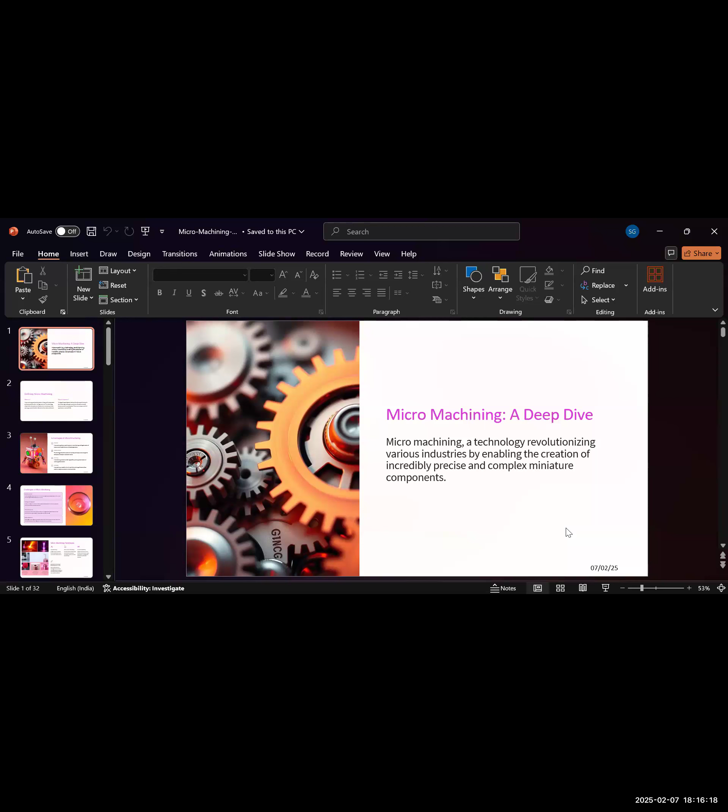Micro machining is a technology that revolutionized various industries by enabling the creation of incredibly precise and complex miniature components that are used in various industries like medical, defense, space, and other areas.

How do we define micro machining? What is it and why is it important? Micro machining involves the creation of very small components with extremely fine details and high precision. This technology allows for the manipulation of materials at a microscopic level, opening up possibilities for advanced and miniaturized devices that would otherwise be bulky and large in size.

We can compress it into a miniature form. Why is it important? Because there's a gap in traditional machining - we are not able to manufacture very small and complex parts using traditional machining methods. So micro machining gives very important solutions that enable nano-scale manufacturing and the production of components with features at the micrometer and micro levels. These micro components find applications in various fields.

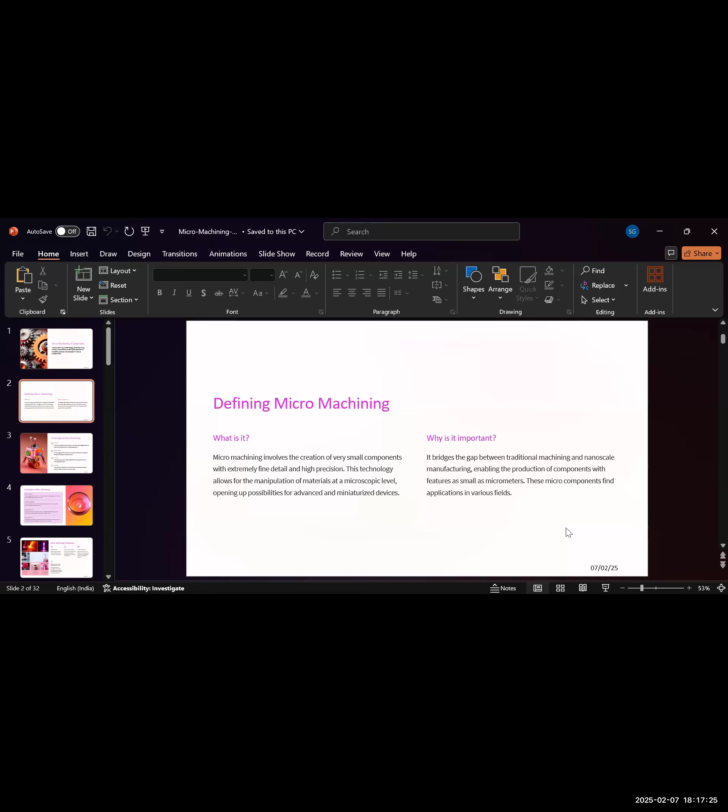What are the advantages of going for micro machining? Number one, we get the highest precision at that level. Micro machining delivers incredible precision in manufacturing, enabling the creation of components with tight tolerances and complex geometries. It also promotes miniaturization - the technology allows the creation of incredibly small components that are not possible with other traditional manufacturing facilities, leading to the development of compact and powerful devices.

Efficiency - it also focuses on the efficiency of the machining process. Micro machining processes are often highly efficient because they have a controlled environment where we can achieve the highest efficiency during the manufacturing process.

It reduces material wastage and optimizes production time. Sometimes in defense manufacturing, we use metals that have the highest cost, highest toughness, and highest hardness, which are very difficult to machine. But using micro machining, we reduce wastage and get efficiency during the machining process.

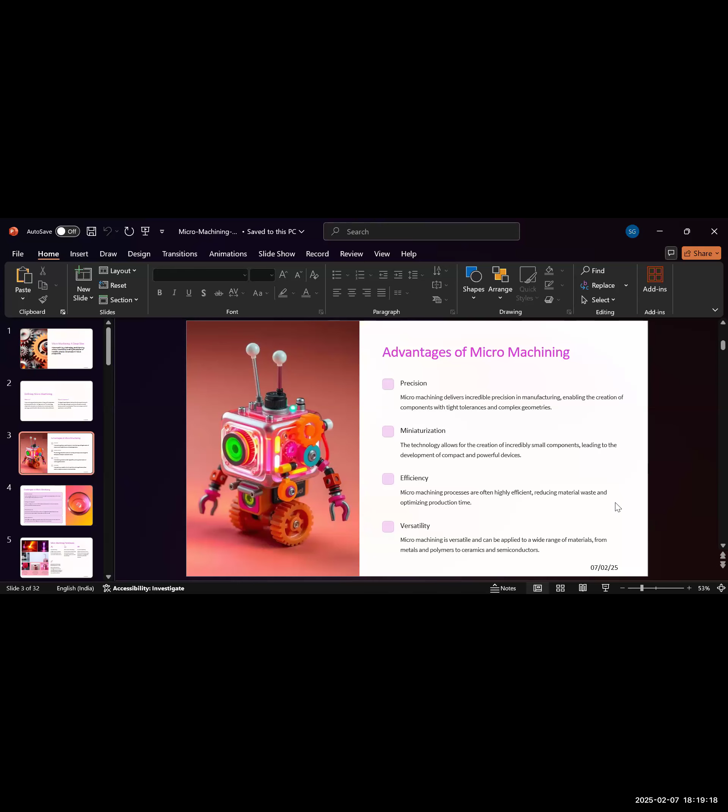So when we talk about micro machining, it is important to discuss the challenges we face in micro machining processes and its adaptability in manufacturing industries, because you've heard of Industry 4.0 and Industry 5.0.

I think everybody has heard of it, yes or no, sir? Hello? Hello? Yes, hello, yes, yes sir.

Yes. Okay, so in the Industry 4.0 environment, we have incremental changes incorporated into traditional machining so that we can do real-time monitoring, improve efficiency, improve safety, and monitor and link machines with communicable devices so they can control and integrate their functions. So when we talk about micro machining in this era of Industry 4.0 and Industry 5.0, we need precise control over the machining process.

Maintaining a high level of precision and accuracy during the machining process is very critical, as any error can significantly impact the final product. If there is an error in any part, it impacts all related dimensions, which deteriorates your final product and can cause rejection of the job.

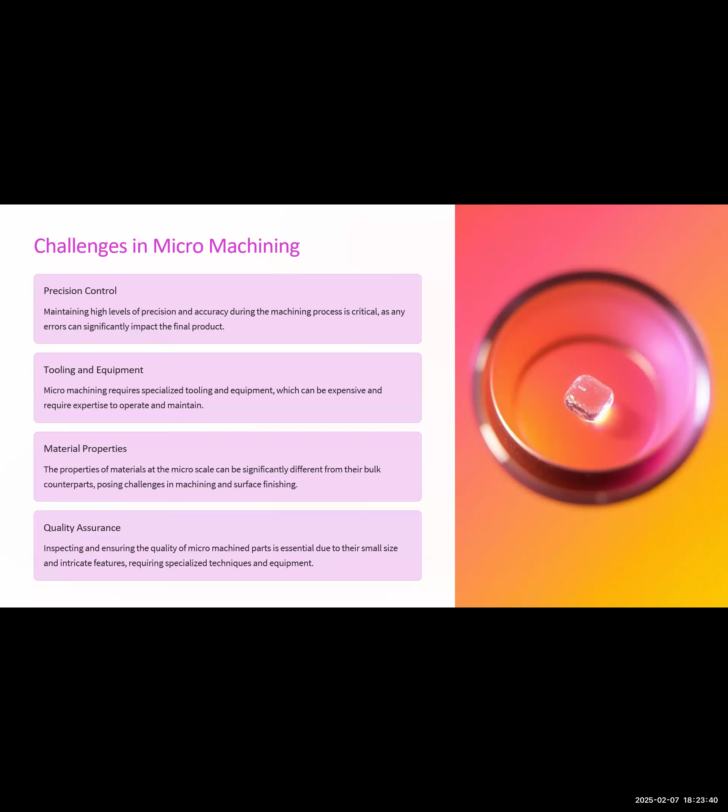So we'll discuss some micro machining techniques here, like laser machining. Laser machining is a highly precise and versatile technique that uses a focused laser beam to remove material. Another one is electron beam machining, which also employs a focused electron beam that melts or vaporizes material, enabling the creation of intricate micro features.

Another one is ion beam machining. It also uses a beam of focused ions that erode material, allowing the creation of intricate microstructures in the workpiece material.

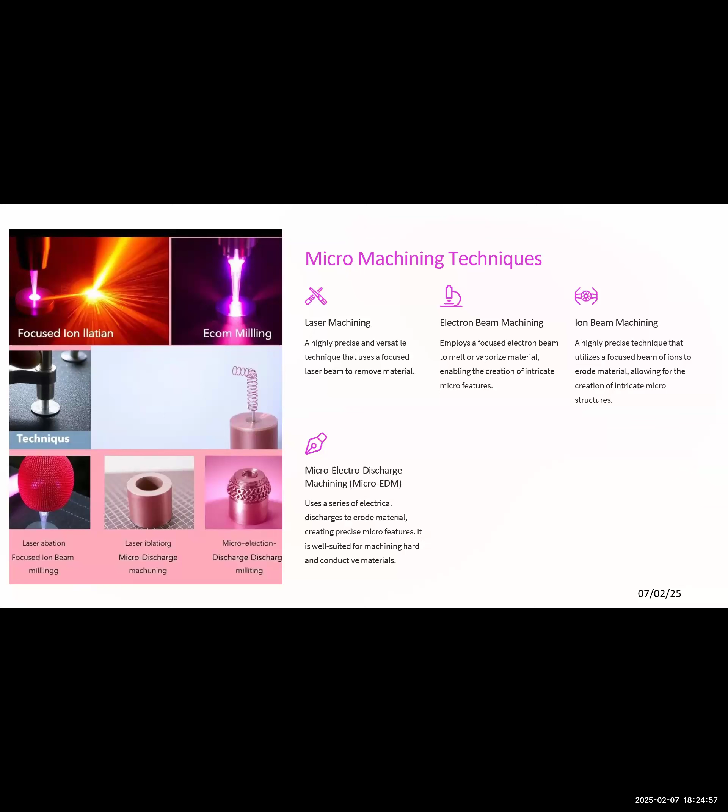Another one is micro electro discharge machining, called micro EDM. It is also a very important process. If you search in the last 5 years, you'll find a lot of research papers published on micro EDM. It uses a series of electrical discharges to erode material, creating precise micro features. It is well suited for machining hard and conductive materials. These are some examples of micro machining techniques that are very frequently used.

Now we shift to the applications of micro machining. There are some fields where these micro machining techniques and processes are used during work, like medical devices.

Micro machining enables the production of miniature medical implants, microsurgical tools, and other advanced medical devices. These are miniature parts that fit in your body and are used for medical treatment and medical attention, like artificial veins.

Microelectronics: micro machining is also essential for the manufacture of microchips, sensors, and other components found in electronic devices. Optical devices: micromachining is also used to produce micro lenses, gratings, and other optical components used in various applications from microscopes to cameras, and in the vast fields of defense and space.

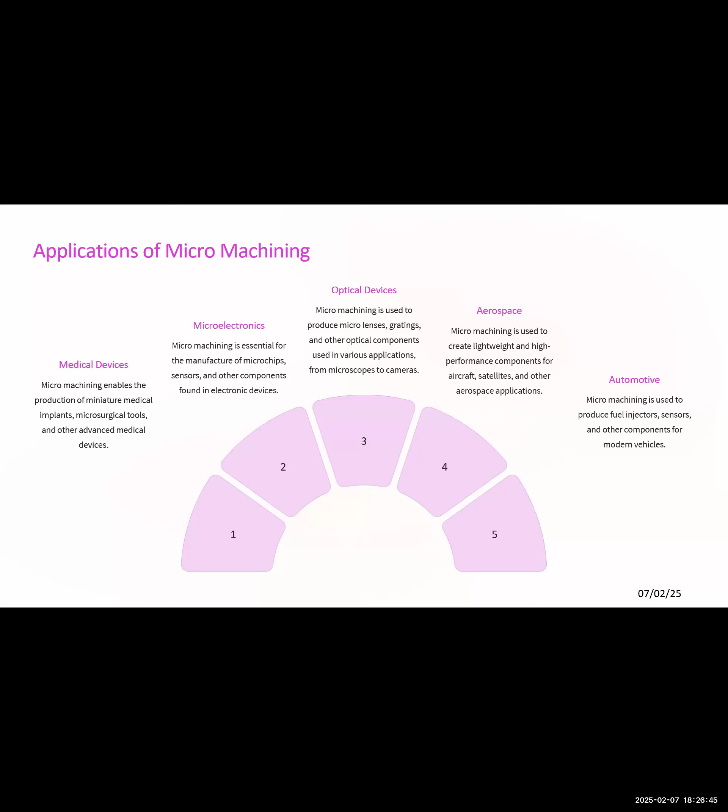Aerospace: micromachining is used to create lightweight and high performance components for aircraft, satellites, and other aerospace applications where weight and cost are very much a factor incorporated during manufacturing. Automotive: micromachining is also used to produce fuel injection components, sensors, and other components for modern vehicles.

Now, about materials. There is no limit to the material, but we have to consider the micro material properties before machining. If we talk about metals, that includes silicon, titanium, gold, and others that are often used for their strength, durability, and electrical conductivity.

Second is polymers. Polymers are also used for their flexibility, ease of processing, and biocompatibility, making them suitable for various medical and optical applications.

Ceramics are known for their hardness, wear resistance, and high temperature stability, making them suitable for demanding applications and for creating miniature components that fit for use.

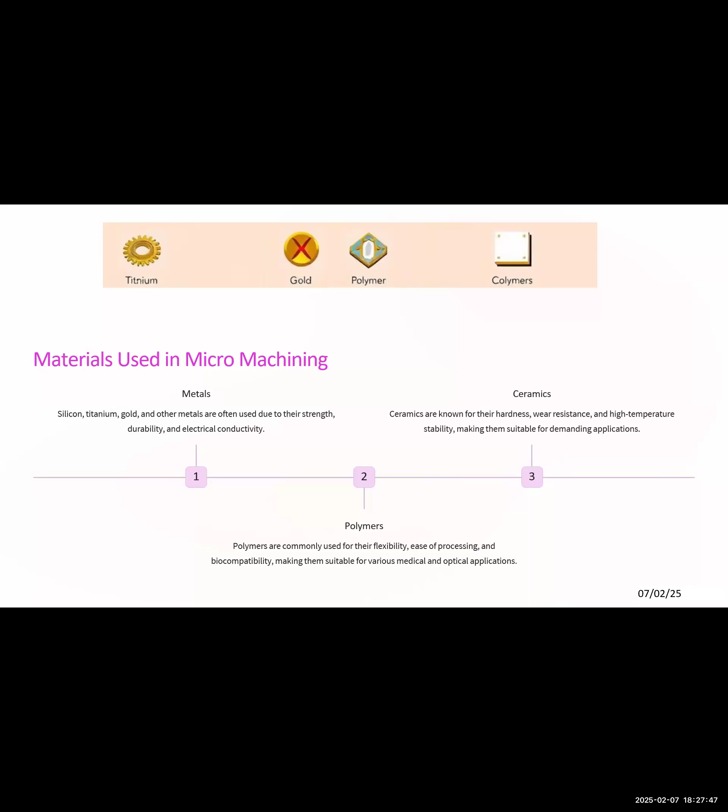So if we're talking about the future of micro machining, it first depends on advanced materials. Whenever we use advanced materials with tailored properties, it enables the creation of even more sophisticated micro components. The advancement of materials is needed for the future.

Integration: micro machining also plays a crucial role in the development of integrated systems, combining multiple micro components into compact, multifunctional devices. The third one is nanotechnology.

The integration of nanotechnology with micro machining will also lead to the creation of even smaller and more complex micro components that are used nowadays in real life.

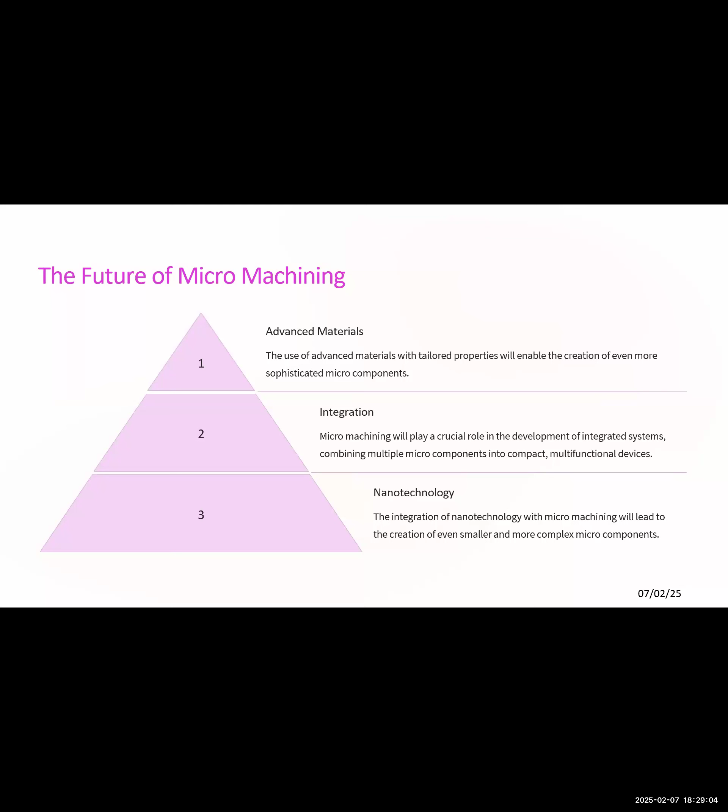Also, everything is going to become compact. Size is going to reduce by using nanotechnology and creating small parts, but combining all the functions into one single piece is very critical. For that, we are using micro machining that can be combined.

So if we talk about defense, since I am involved in defense manufacturing, I will explore and discuss two to three cases that use micro machining processes in defense manufacturing. So, the revolutionizing of defense - discover the impact of micro machining in the defense industry.

So the advantages in defense applications: first is enhanced performance. How is it enhanced? Micro machined components offer increased precision and reduced weight, which is a main problem in the weapons our forces use. So reducing weight while maintaining strength, because we cannot compromise on the strength of our ammunition and ordnance - using micro machined components, we can offer reduced weight and enhanced durability of the components, leading to improved performance in defense systems.

Miniaturization: micro machining enables the creation of compact and lightweight components that are crucial for reducing the size and weight of weapons, sensors, and other defense systems - like visual systems, target fixing systems, recoil systems, and others.

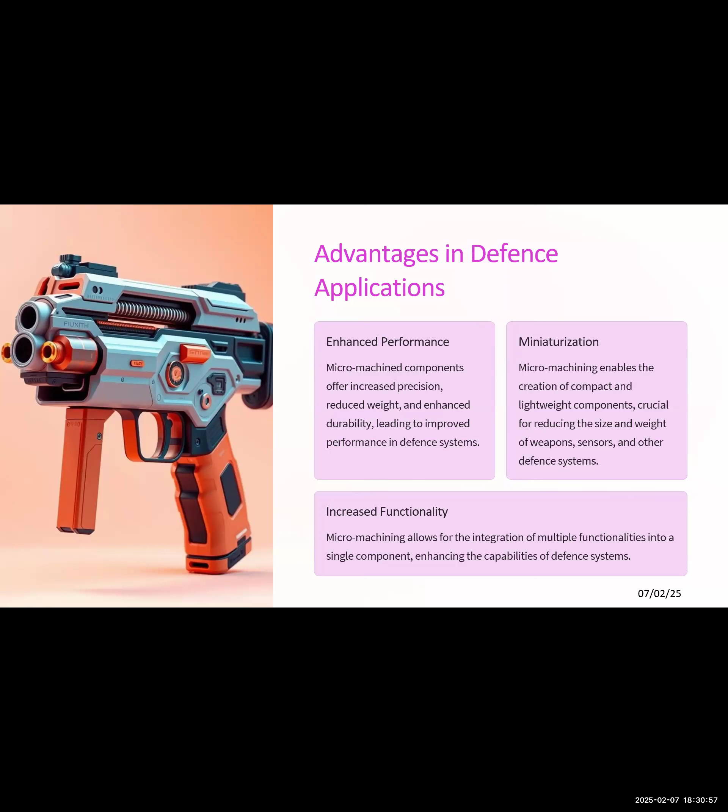The third is increased functionality. Micro machining also allows the integration of multiple functionalities into a single component, enhancing the capability of the defense system. So for micro scale components in weapon systems, we can use precision gears - micro machined gears that have high accuracy and efficiency, enabling smoother operation and increased performance of our weapons.

The second is miniature ball bearings. Micro machined bearings provide low friction and high durability in weapon systems, reducing wear and tear while enhancing the accuracy of the ball bearings where they are used.

Micro actuators are also required because in a weapon system there are a number of components that actuate together. Each function has an important and crucial role, which is why in defense manufacturing safety is the first thing we consider through quality control. The micro actuator enables precise control and movement in the weapon system, enhancing targeting accuracy and overall performance of the weapon.

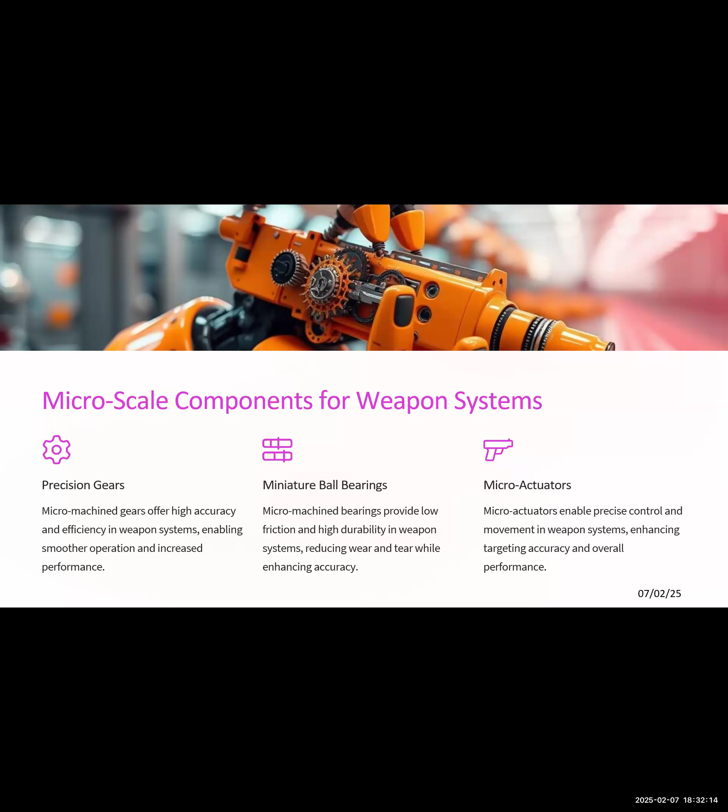The micro optics sensor for surveillance and targeting. Like in previous slides, we discussed optical applications. Micro optics are also used in mirrors, cameras, sensors, and lenses, micro machined lenses, with advanced surveillance systems that enable high resolution imaging and improved target identification in areas where it is very difficult to identify the target.

Microsensors: developing microsensors, including pressure sensors, temperature sensors, and accelerometers, provides real-time data for critical decision-making in defense applications. Integrated systems: micromachining also enables the integration of optics and sensors into a compact and portable system, enhancing battlefield awareness and targeting capabilities.

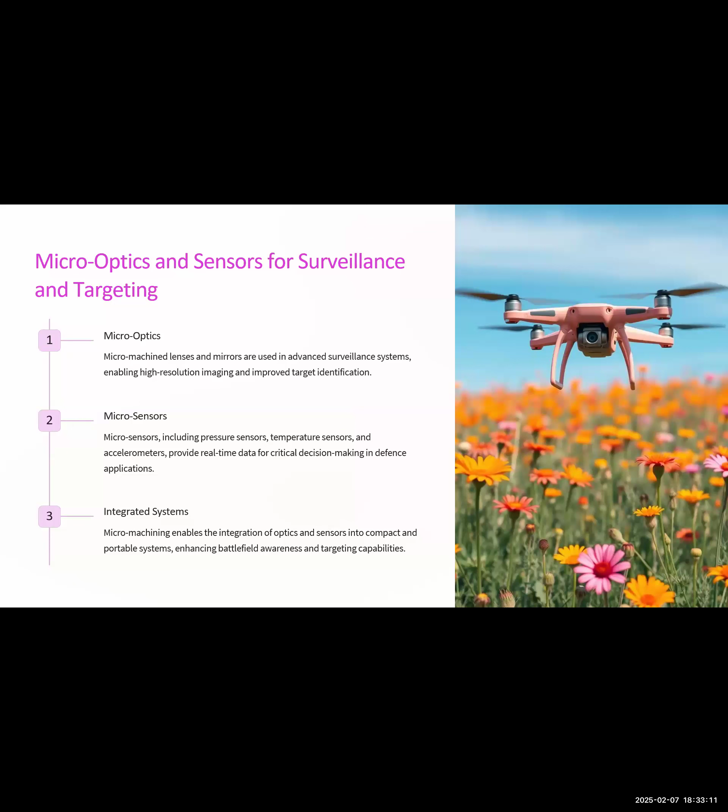Now, microfluidics for advanced technology is also done by micro machining methods, because microfluidics is required in various places. Microfluidic devices use microchannels and chambers that manipulate fluids at a microscopic level. It enables precise control and analysis, not only in defense manufacturing applications but in various other applications also, like biodetection.

Microfluidic devices are used in biodetection systems, enabling rapid and accurate identification of biological threats, such as chemical agents or pathogens. Drug delivery: it is also used to control drug delivery in battlefield medicine, ensuring targeted treatments and improved outcomes.

What are the challenges and limitations in defense or other industries when we go for micro machining? First is complexity. Micro machining requires advanced engineering skills and specialized equipment, making it a very complex and challenging process. You need specialized trained operators, specialized maintenance, specialized tools, and specialized quality checking procedure systems. So you have to control or encircle the complexity of the system.

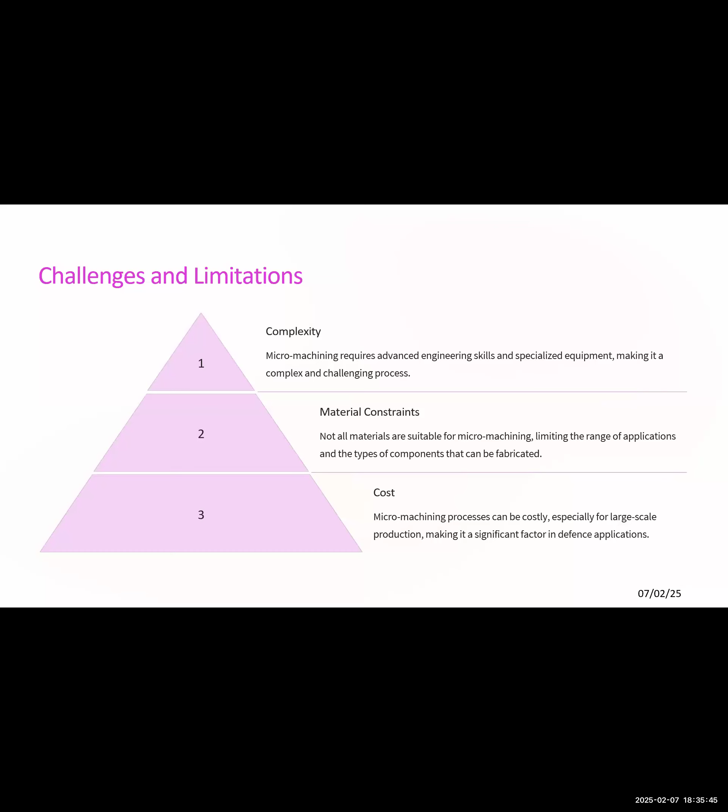Now we discuss some future trends and innovations in micro machining. Nanotechnology is a very important future technology that is being integrated with micro machining, because further miniaturization is expected to be possible only if we integrate the micro machining process with nanotechnology, which enhances functionality in defense applications and other areas also.

Artificial intelligence controls, monitors, and coordinates all the processes and systems in real-time monitoring or real-time observations that create a visual image. So AI-powered micro machining systems automate and optimize the process, leading to improved efficiency and reduced cost.

Additive manufacturing: combining or integrating micro machining with additive manufacturing allows creation of complex and customized products or components that cannot be manufactured by any available traditional manufacturing methods.

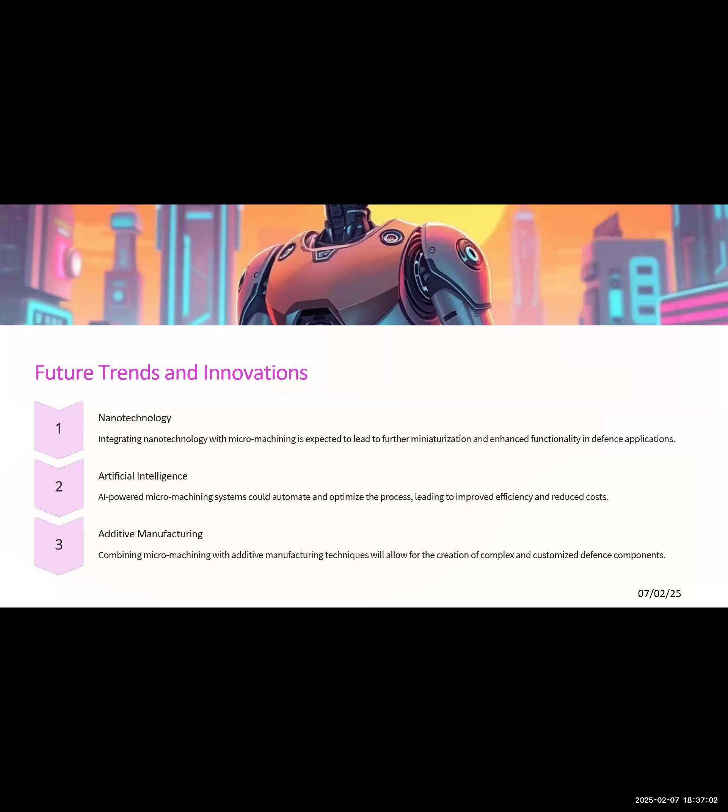Now, after getting the overview of the micro machining process, we discuss digital twin technology. What is the digital twin?

Are you getting my voice? Yes, sir. Okay.

So we discuss the application of digital twin. First we understand the digital twin, and then we go for the application of digital twin in micro machining. So what is a digital twin? Digital twin technology is a powerful tool that is rapidly transforming industries, allowing virtual representation of real world objects, real world systems, and real world processes. This presentation explores key concepts, applications, and features.

So, a digital twin is a virtual representation of a physical asset, process, or system that mirrors its real-time counterpart. What are the key features? Digital twins are real-time, dynamic, and data-driven. A digital twin collects and analyzes data from sensors, databases, and other sources to create a comprehensive digital model, and that digital model represents your physical asset, process, or system as a digital twin.

Hello, yes it's okay, you are getting it. Okay, so the transformative potential of digital twin in revolutionizing the micro machining industries, that we can explore here.

So we have already discussed what is a digital twin and what this is. So when we're talking about digital twin in manufacturing systems, how is it beneficial to us? It improves the efficiency of our manufacturing system, manufacturing processes, manufacturing workout.

Digital twin enables optimization of process by simulating various scenarios and identifying areas where improvement is needed. Sometimes the work is going to repeat. When you make a digital twin, you can customize, reorganize, rearrange your process, your machines, your operations, so it can improve your efficiency and optimize the process.

The second important thing is enhancing quality. When you get real-time insight and monitoring, the digital twin contributes to product quality and consistency. Nowadays we are using some online gauging systems. That online gauging system works during the manufacturing itself, so you can measure the quality parameters needed, assisted with this process, matched by the digital system.

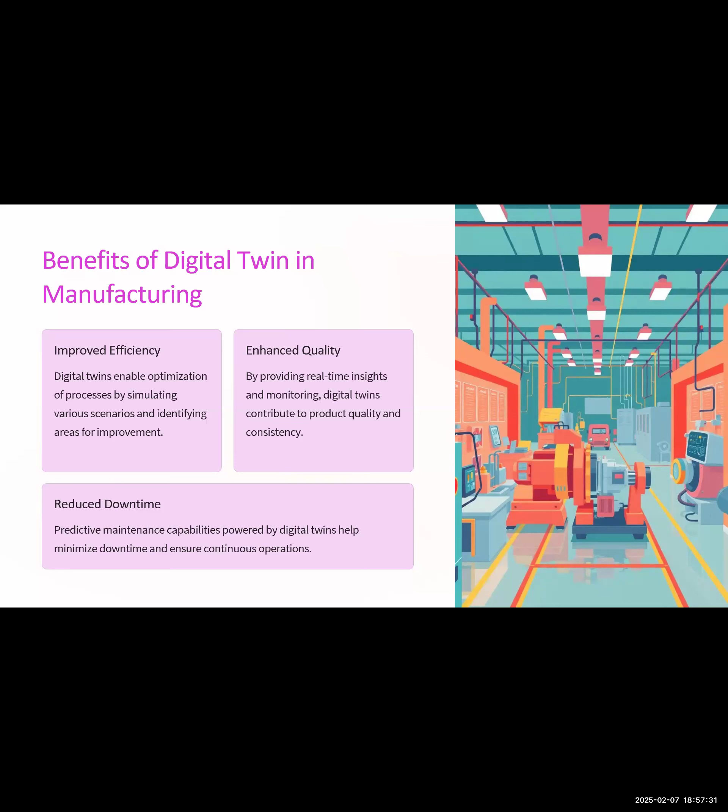It reduces the downtime. When we go for the machine, we go for predictive maintenance, we go for condition-based maintenance, because predictive maintenance capability powered by digital twins helps minimize downtime and ensure continuous operations.

What are the challenges we face in manufacturing when we use digital twin? First is extreme precision, because micro machining requires unparalleled precision, making it susceptible to minute errors and variations. Tool wear and tear: miniaturization amplifies the impact of tool wear, requiring frequent maintenance and adjustment. Complex geometry: you have to monitor the intricate geometry involved in micro machining, so creating this digital twin model with a real-time model is a challenge in micro machining systems.

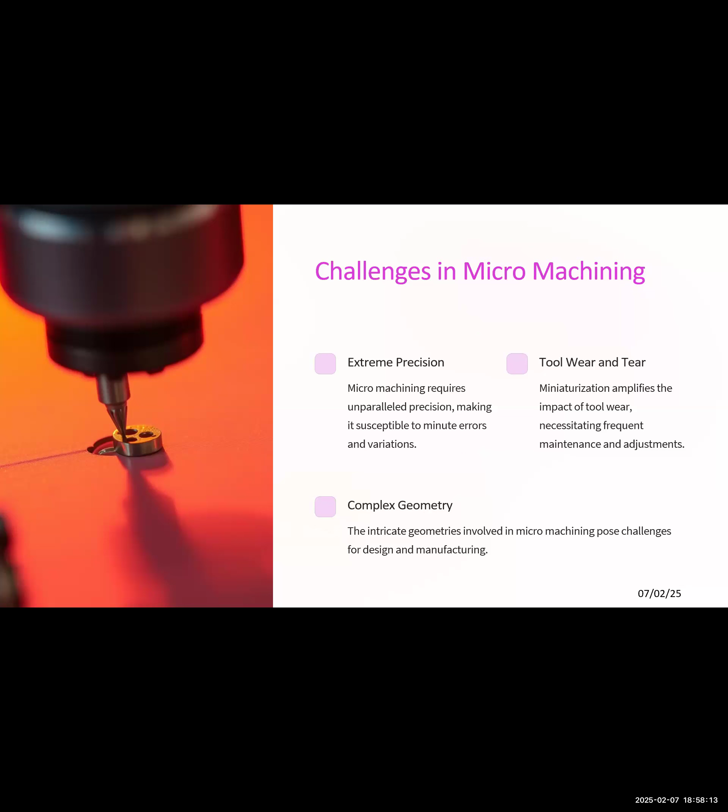So for digital twin system process optimization, how can we use it? We can do process simulation first. Digital twin enables virtual simulation of the micro machining process. This simulation allows engineers or operators to experiment and optimize the parameters. For example, in an EDM machine, we are using...

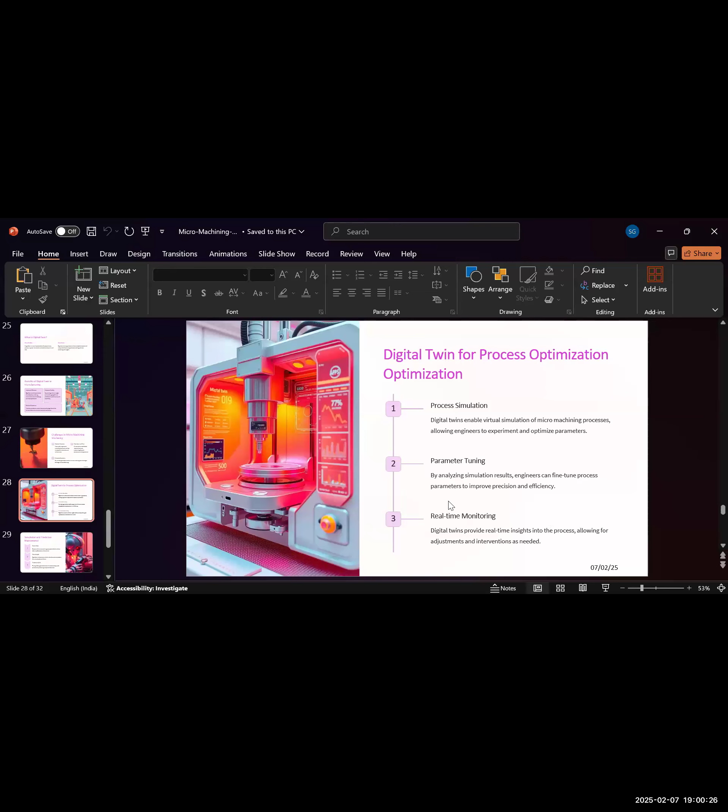So I'm talking about process simulation. Digital twin allows virtual simulation of the micro machining process, so we can calculate the changes required to optimize the parameters and get the maximum MRR or whatever else we need in this machine.

The second thing is parameter tuning. By analyzing simulation results, we can fine tune the process parameters to improve precision, improve efficiency, and get the maximum output in various manufacturing processes.

The third very important thing is real-time monitoring, because in some places we are not getting real-time output of what is going on in our process. Through the digital twin you can get everything, and also record data from all your previous work, so you have a database too. Digital twin provides real-time insight into the process, allowing necessary adjustments and interventions at any point of time.

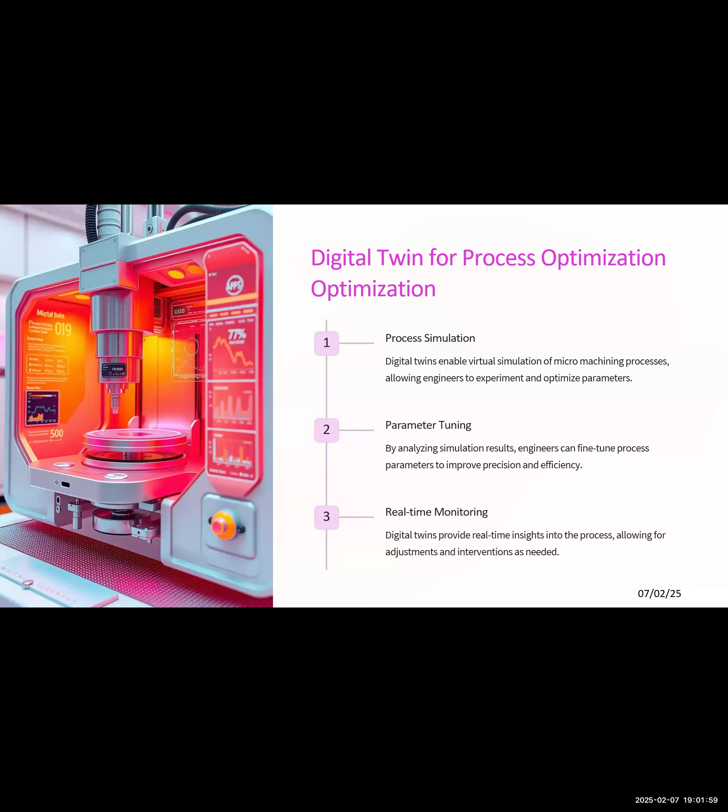Now, simulation and predictive maintenance is also one part where we can use the digital twin. For that, we need sensor data. Sensors on micro machining equipment collect real-time data on their performance and condition. In data analysis, the digital twin analyzes the sensor data to identify trends and patterns that indicate potential failure.

In this data analysis system, let me give you one case study. We have 10 machines, very important and critical machines, allocated in different sections of our industry and factories. We connected all the data flow sensors of all 10 machines and created a digital system in one user interface for all 10 machines, because these machines are very critical.

We monitored these machines using golden parameters. We selected and identified those golden parameters, and created a digital twin condition-based system using them. Whenever any golden parameter changes, we identify where the deterioration is going on. Accordingly, we predict it and correct it, so the breakdown is reduced. This is one case study that we implemented in our factories.

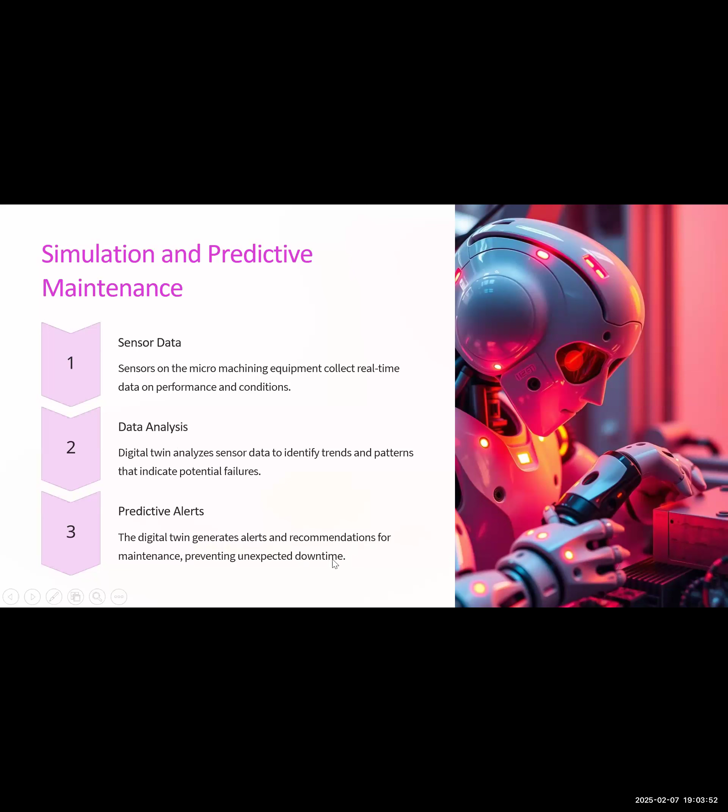So, integrating digital twin with micro machining - what is needed? First is hardware integration: sensors, actuators, controllers that are integrated into the micro machining equipment. The second important thing is data acquisition - once the hardware is integrated, you have to acquire data from these sensors, hardware, and electronics software you are using, so real-time data from the machine is captured.

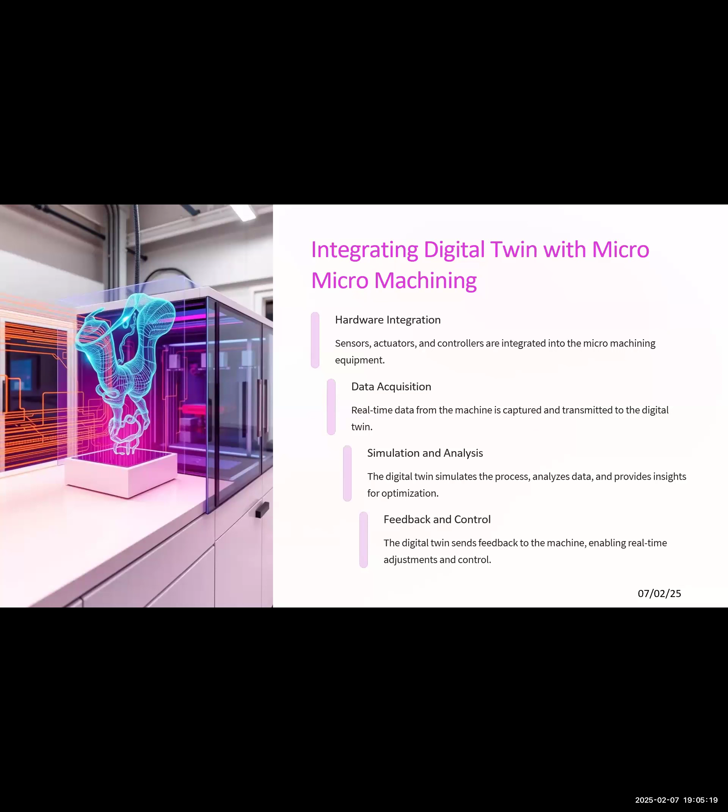This data is transmitted through the digital twin system, then simulation and analysis - the digital twin simulates the process, analyzes the data, and provides insight for optimization. The last is feedback and control: the digital twin sends feedback to the machine, enabling real-time adjustment and control, because once you make the data, it may change due to the number of parameters and conditions involved. So you correct it using your feedback system - whenever change or correction is needed, you update your model so that next time you get the desired result, giving correct and precise control.

So we come to the conclusion part: future outlook and conclusion. Digital twin technology holds tremendous potential to advance micro machining, enhancing efficiency, quality, and sustainability. As technology evolves, we can expect further integration of digital twin with AI and robotics, leading to even greater breakthroughs.

So, digital twin technology is transforming micromachining by using real-time monitoring, adaptive controls, and predictive maintenance. Despite challenges, advances will continue to enhance its capability, making micromachining more precise, more efficient, and more intelligent.

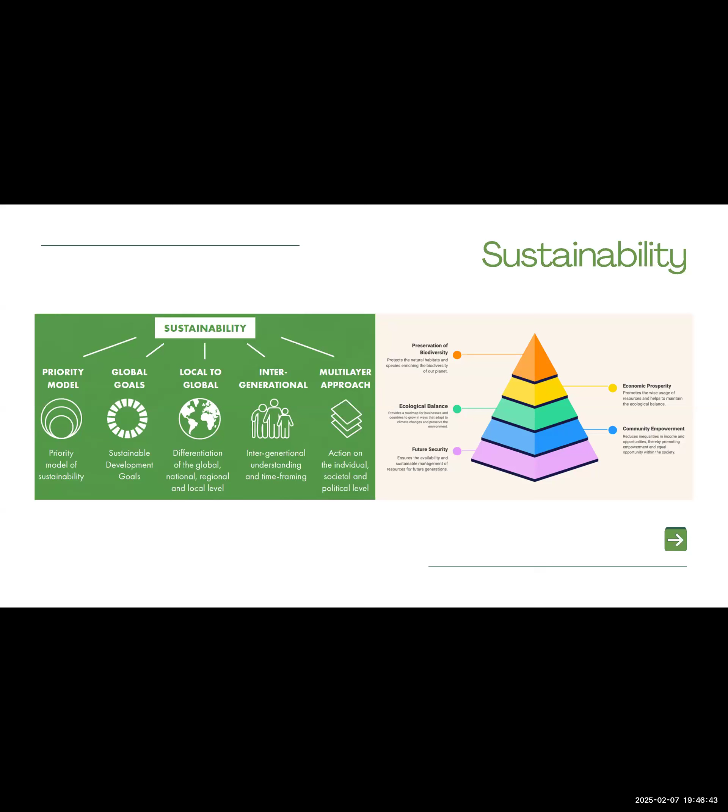Then the biodiversity, we are trying to protect everything and then do it. So these are all part of sustainability we do.

This is very clear and now talked about everywhere, 17 goals which are there. If you see, every possible thing fits in here. So you can take up anything.

So education, if you say, education comes in goal 4. You can say in sustainability also education comes. Gender equality also education comes. Then you can also talk about partnership for the goals, goal 17, education comes there too. So if you do anything, if you can fit in at least 5 of these goals, then you are sure into sustainability.

So what are the parts of sustainability? One is people, prosperity, peace, partnership, and planet. So all these things are part of the sustainability goal. It's not just talking about prosperity, it's also talking about people and prosperity. Even prosperity means it is not making a sacrifice on peace, it is prosperity and peace also. And it is not I growing, it is we growing, partnership. And finally, we all grow on the mother planet, so that is planet. So protect our planet, natural resources and climate for future generations.

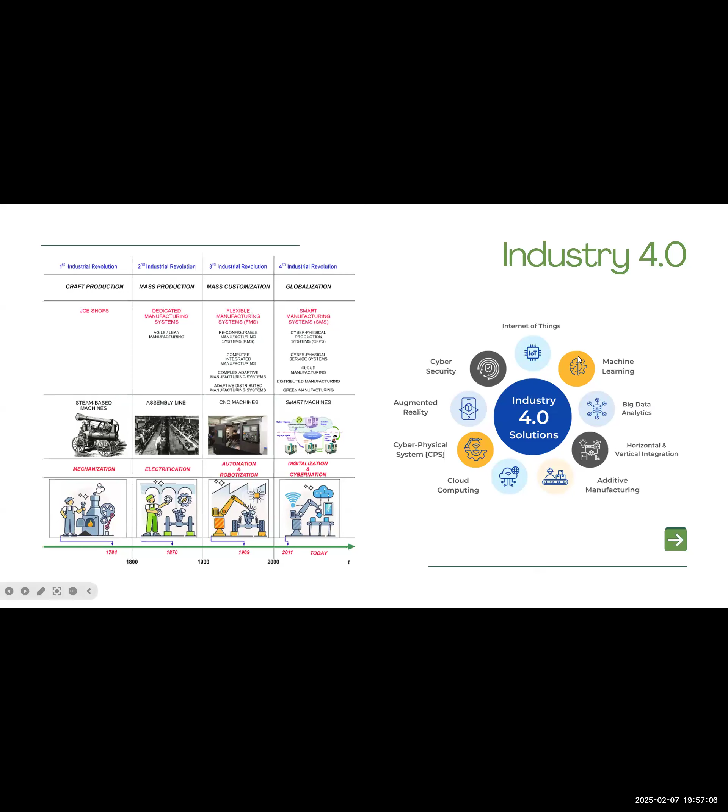So now when we have all these things attached together in the sustainability goal, you will try to move towards a brighter future. When we talk about manufacturing type, I was talking about mass manufacturing, which was in the past, up to the 1970s.

It was all mass manufacturing focused on high volume production with economy of scale. Then came lean manufacturing, emphasis on waste reduction and efficiency. Today also, if you see, even the motor pumps attached in the field run at 100 horsepower, 10 horsepower, 50 horsepower. These things are huge.

So now what we are trying to do is understand that, and bring in little bit of changes and then start doing it.

Waste reduction can be practiced in your hostel also. Every day, if you have a typical hostel, boys hostel or girls hostel, where around 400 people are there, the bio-organic waste, vegetable waste is around 100 kgs every day. This is nothing but cooked food which is wasted. So when you talk about lean manufacturing, we are only trying to look at how will I produce, how will I customize to meet the requirements without getting wasted. The emphasis of waste reduction and efficiency comes as part of lean manufacturing.

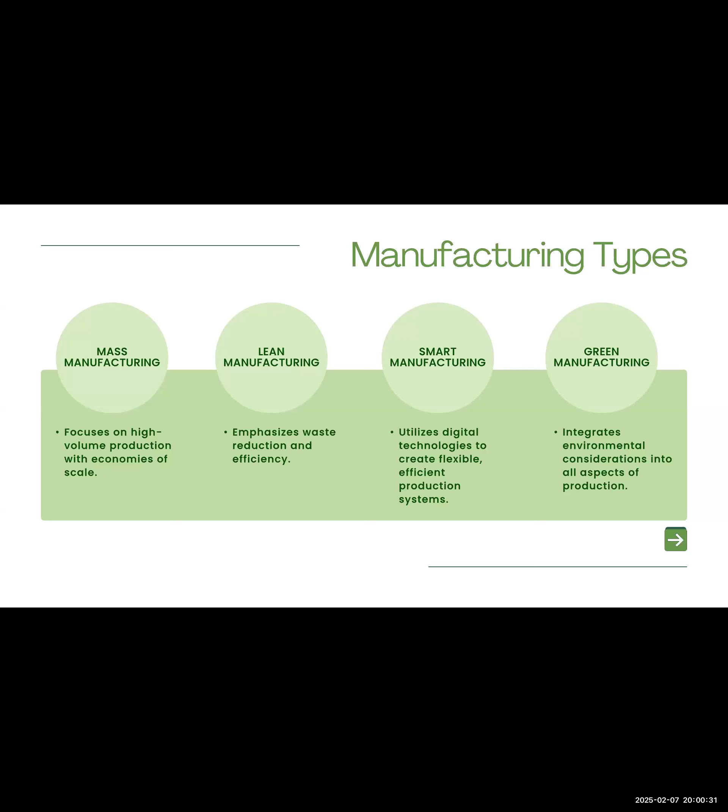So now when we look at smart industries, they work on three things: network centric, manufacturing technology, and digitization. When we talk about networking, it is servitization, and then we talk about smart products, flexible manufacturing, smart working and sustainability.

So today data is available, then data has to be made contextual, data has to be activated, and data in action. When you talk about data availability, relevant supply chain and factory information are collected. Today everybody, including me, buys everything through GPay, so all the data is stored somewhere. Through that data, they can figure out how many times in a month Ram Kumar has bought bread, how many times he has bought curd, when he bought curd, and whether he will buy curd next month or not. All these things are data availability.

Data contextualization is when information is combined to reveal deeper insight. So first was data, the second is information. From the data, you extract and remove all the noise, and when you contextualize, you have information from data.

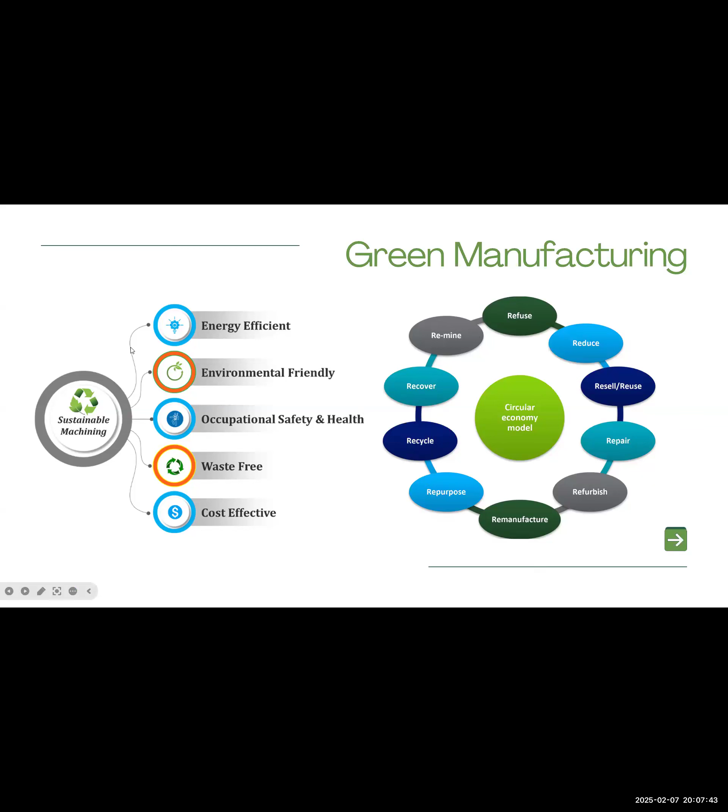Then we do recovery. That's what we do on a computer, on a smartphone, on batteries. We recover things, and then we remine, so we try to find out what else we can do. Sustainable machining leads to energy efficiency, environmental friendliness, occupational safety and health, waste-free operation, and cost effectiveness. All these things are part of sustainable manufacturing.

So what is sustainability 4.0? It includes additive manufacturing, cloud computing, IoT, blockchain. All these are part of various practices towards sustainability 4.0 implementation. The research trends in sustainability 4.0 include smart factories, smart sustainable cities, reduce-reuse-recycle adoption and implementation, effective product service, transparent systems, and improved business and product lifecycle assessment.

The sustainability 4.0 key features are enhanced sustainable manufacturing, pollution control, digitization, transformation potential, and waste reduction. It also involves development of better products to address climatic change and pollution, with environmentally friendly design.

Digitization reshapes the economy and enables better resource management, transformation, and flexible manufacturing. Today we talk about 4D technologies, in which you activate the product to move left and right by external force. So flexible manufacturing systems and employee safety are also very important.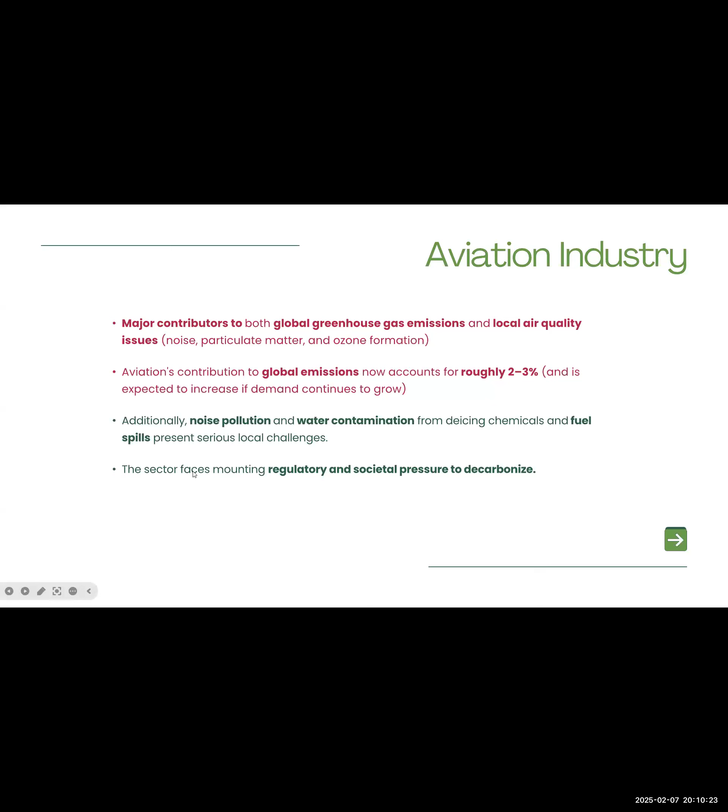Noise pollution and water contamination from de-icing chemicals and fuel spills is also creating a lot of problems. The sector faces mounting regulatory and societal pressure for decarbonization.

In 2025, passenger growth and continued supply chain challenges will happen. The International Air Transport Association's 2025 financial outlook for the global airline industry predicts passenger numbers might hit 5.2 billion, up 6.7% compared to 2024. Despite strong demand, persistent supply chain restrictions are affecting airlines, so profitability and growth is one important thing. The bottom line is expectedly a record-breaking year of revenue for 2025.

While airlines are poised to break records in revenue, profitability remains under pressure. So you should understand, more passengers moving through does not mean we have made a fortune or will make a fortune, due to high operational costs and supply chain issues.

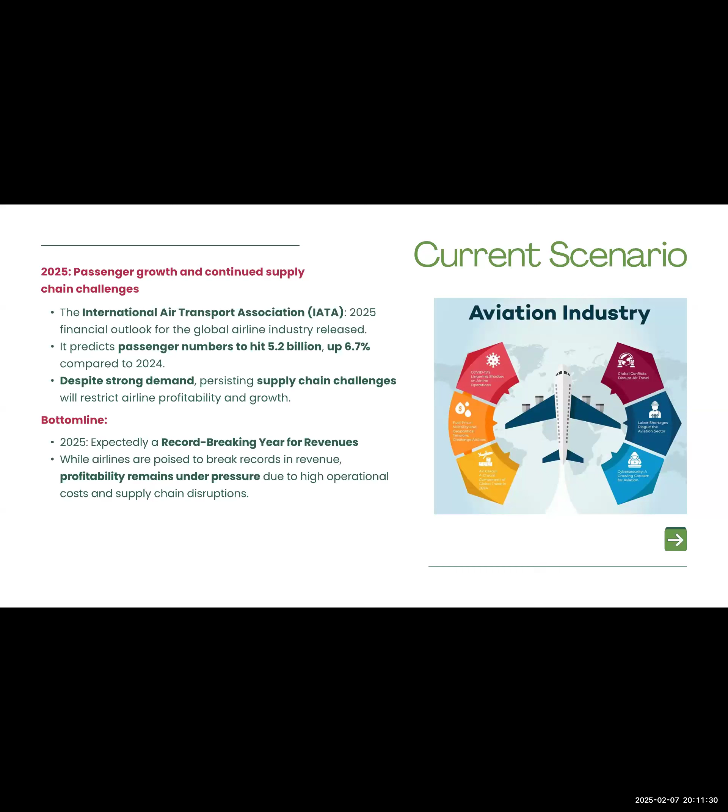So the rise in passenger traffic is well documented, especially in the Middle East and elsewhere, but you should understand that the airplane is one of the most inefficient vehicles in mankind that people try to use.

So 5.2 billion passengers will travel in 2025, an increase of 6.7%. But the efficiency of these processes is less than 5% or 10%. Because of that, they are in no way energy efficient and in no way sustainable solutions.

So for the global airline industry, in this record-breaking year of revenue, total revenue is expected to surpass the 1 trillion mark for the first time ever, a 4.4% increase over the previous year. Yet profit remains modest despite the revenue surge.

So that's the other side of the model: a profit of 36.6 billion in 2025, up from 31.5 billion in 2024. You can see here the business keeps changing and trying to adapt. The revenue is not so good, though profit is there. Costs are expected to increase by 4% in 2025, and a huge amount of money is maintained.

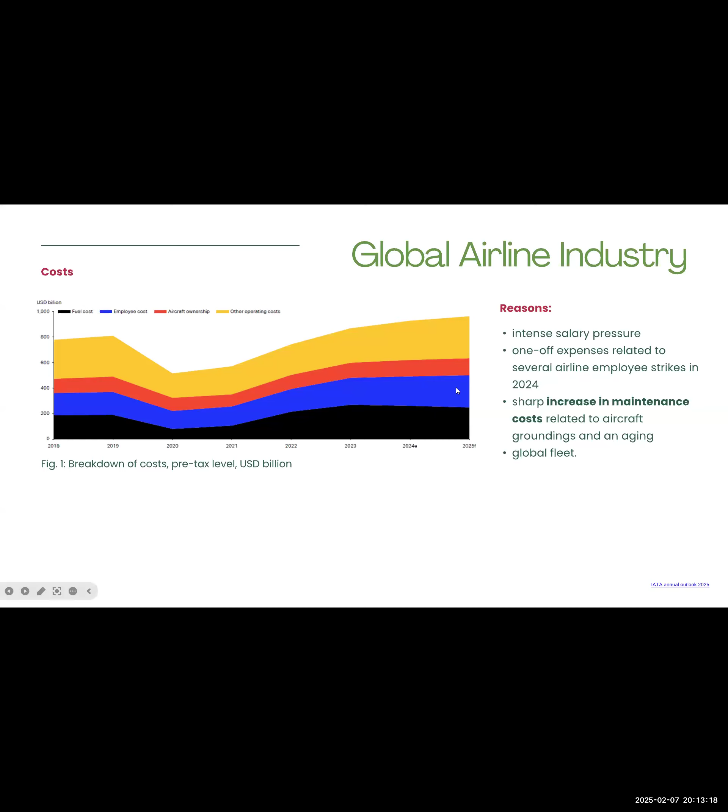There's intense salary pressure, with one-off expenses related to several airline employee strikes in 2024, plus a sharp increase in maintenance costs, making things a little more expensive. Employee costs are increasing, and aircraft ownership costs are also increasing.

So look at the average age of the fleet - there is an aging fleet. Because of this aging fleet, inefficiency in the system is increasing, requiring higher fuel burn and additional capex for unplanned retrofitting of aircraft. So even with everything said, the airplane is not a sustainable solution - that's what I wanted to present to you.

We talk about automobiles, but the plane is the same situation. So what are the challenges we now face in moving toward sustainability?

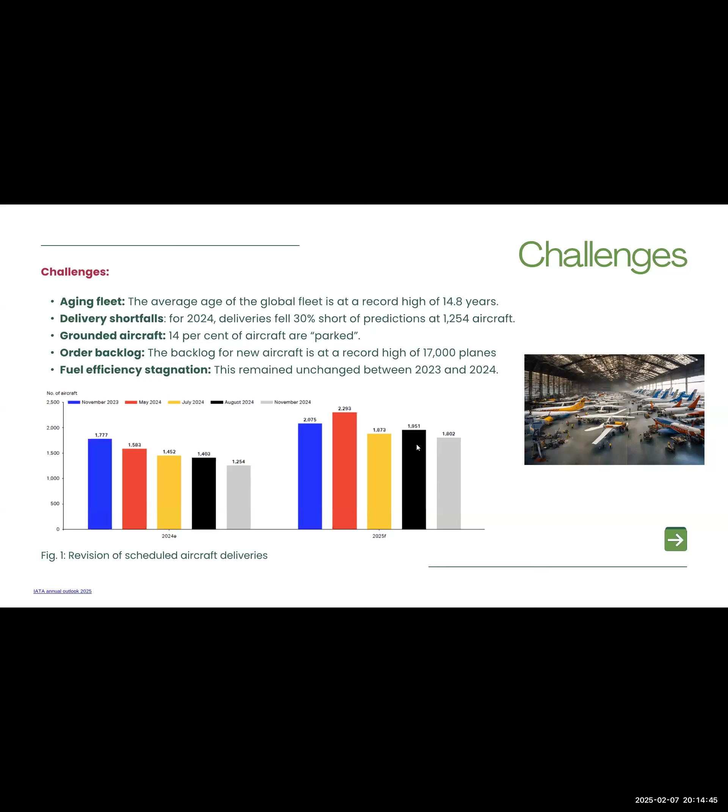Aging fleet, because the average age is already 14.8, so the efficiency is low. Delivery shortfalls, 30% prediction at this thing is there. Grounded aircrafts, 14% of the aircrafts are parked because it is not a sustainable solution. Ordered backlog, the new aircrafts are very much in demand. Around about 17,000 planes are required. The fuel efficiency stagnation remains unchanged between 2023 and 2024, so the efficiency is not increasing. So if you look into it in totality, the overall efficiency of the aviation industry, keeping sustainability, is very poor.

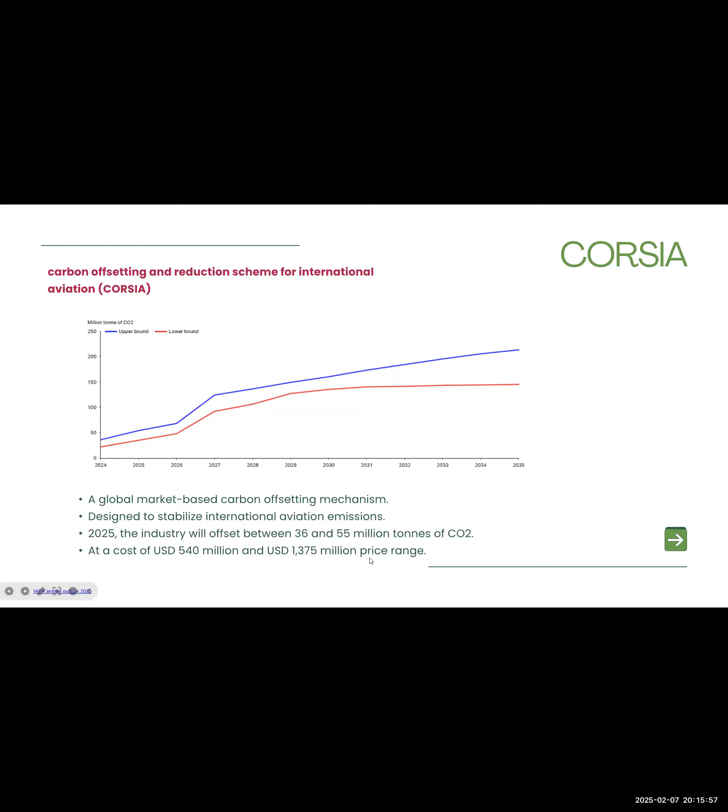The carbon offset and reduction scheme for international aviation is also there. The global market-based carbon offsetting mechanism is coming up in a big way, designed to stabilize international aviation emissions. So from 36 we are now going to 55 million tons of CO2 generated at a cost of 540 million, and USD has 1,375 million price ranges at this cost.

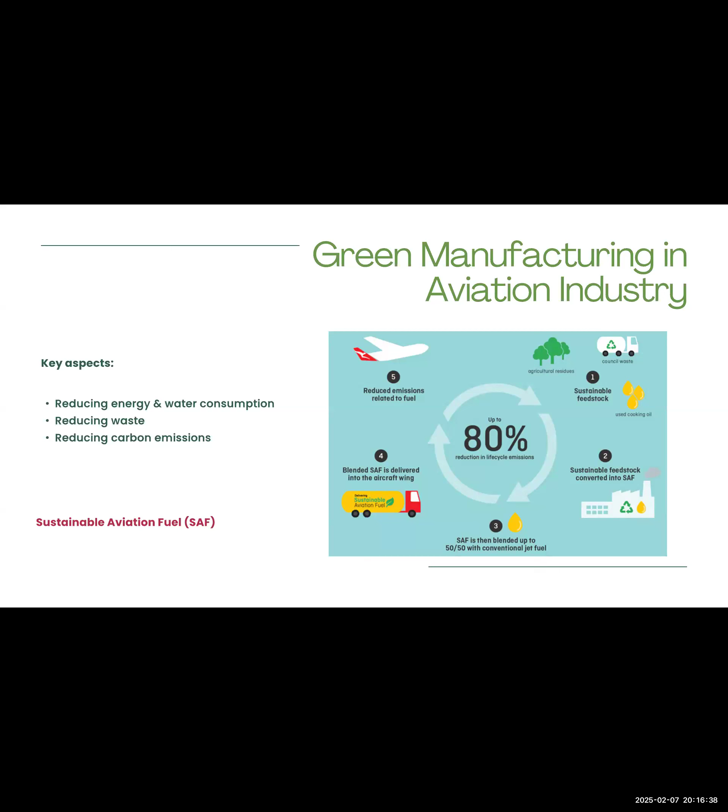The green manufacturing in aviation industry is looking for sustainable feedstock, converted into SAF, sustainable aviation fuel. SAF is then blended up to 50-50 with the conventional jet fuel. Then the blended SAF is delivered into the aircraft, and the reduction in emission related to fuel is also tried. Up to 80% reduction in life cycle emission can be done when green manufacturing in aviation is done. The reduction in energy, water consumption, waste and carbon emission are the key aspects of aviation industry. SAF is of critical importance in the aviation industry's decarbonizing effect.

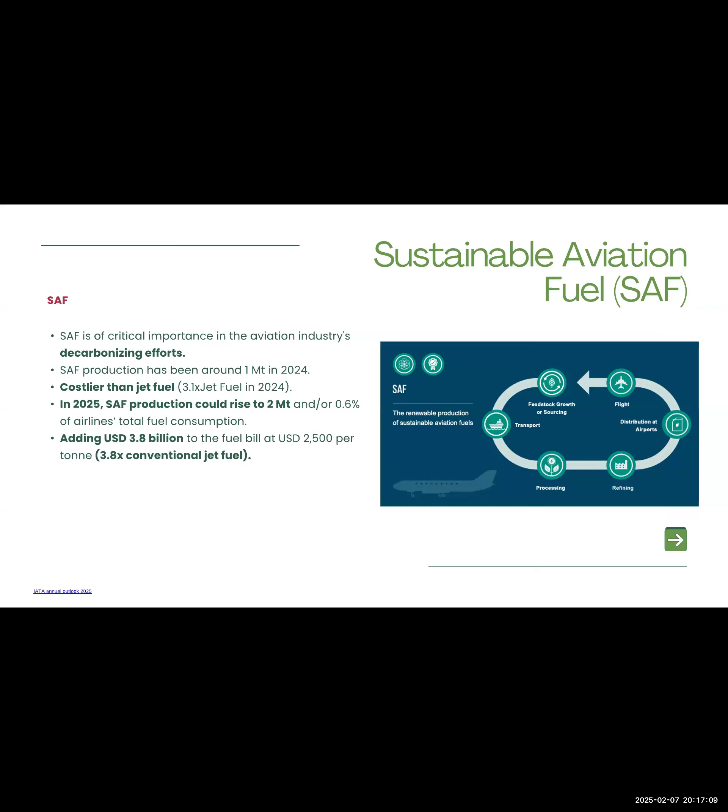SAF is currently costlier than jet fuel. SAF could rise to 2 metric ton, which is around about 0.6 of the aviation industry, and finally add USD 3.8 billion to the fuel bill at 2,500 per ton.

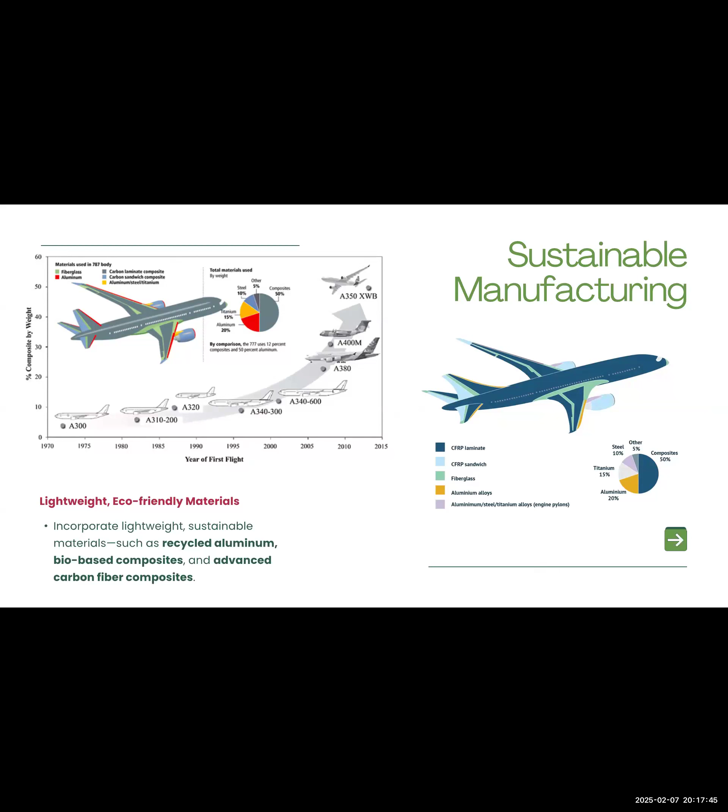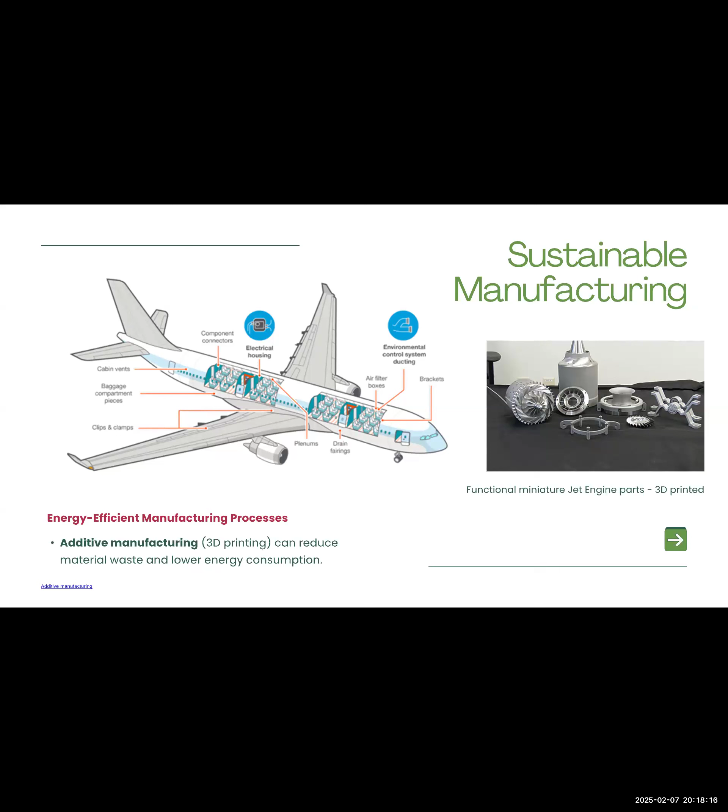So if you look into it, CFRP is used all around the plane, laminates. CFRP with sandwich is used here. Fiber glasses are also used here. So in sustainable manufacturing, the parts used in aviation industry are all 3D printed. The number of components are reduced, the design is revised, testing is going on. So what will happen is the part size and number of parts will go down, the part assembly size will also go down, and overall weight will also go down. So additive manufacturing plays a very important role in terms of sustainable manufacturing for aviation industry.

So today we talk about circular economy. Circular economy is, we are looking at airport and aviation waste, and from there we are trying to get a sustainable jet fuel. From the sustainable jet fuel, we are trying to get into airport and aviation. You can see from here: raw material, part manufacturing, product assembly, distribution, then in service. After in service, you will have reuse, then repair, then repurpose, remanufacturing, and finally recycle and recover. So this is a value chain which is thought of.

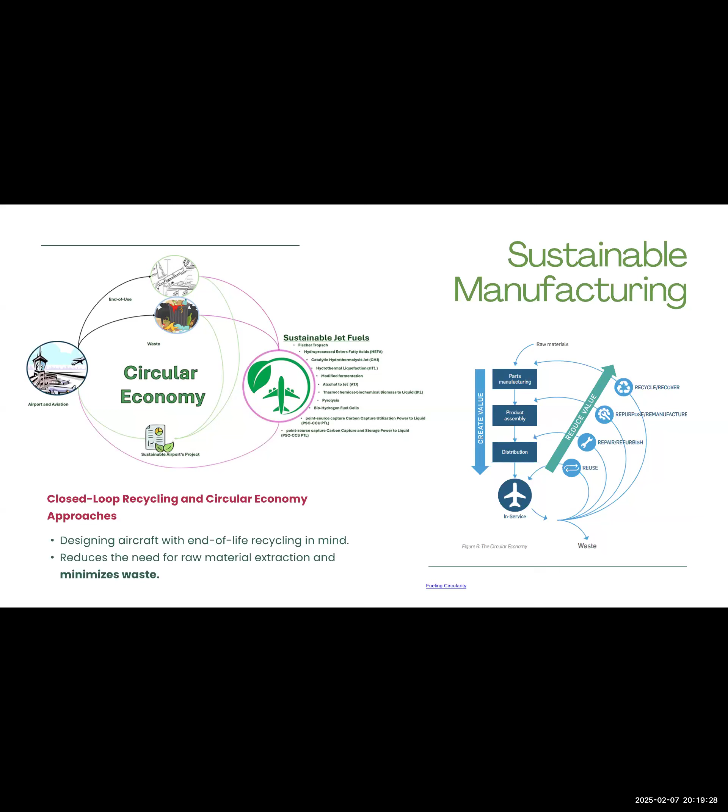A closed loop recycling and circular economy approach is to design aircraft with end-of-life recycling in mind. That means, when one part fails, the entire plane, all the parts must fail together, so that you don't plan few parts having a longer life and few parts having a lesser life. This reduces the need for raw material extraction and minimizes waste. So all these things are part of sustainable manufacturability in aviation industry.

So when we talk about circular economy practices in aviation industry, we have upcycling industrial waste. We also have reduced use of paper, so electronic airway bills, electronic boarding passes, iPads and tablets provided to crew instead of magazines. Then onboard and ground waste recycling, onboard and ground waste upcycling, upcycling hazardous waste, and recycling hazardous waste. So these are some of the circular economy practices in aviation industry, which can give you a huge benefit.

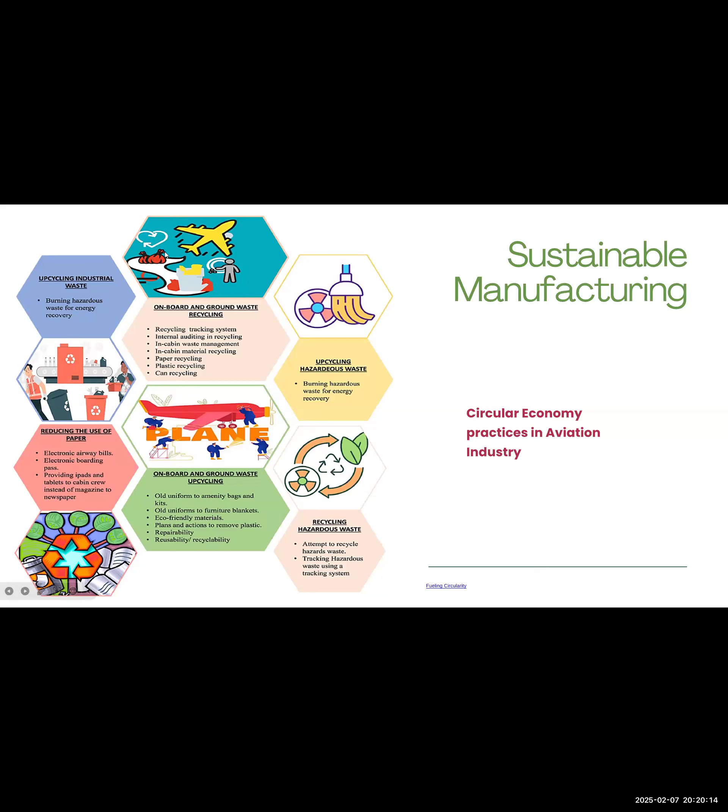We are also looking at winglets to reduce induced drag components, looking at weaker vortex, and trying to redesign the plane itself keeping sustainability as a goal. Without a winglet, you can see there is a turbulent rotation and a vortex is created, which leads to inefficiency. Winglets reduce these induced drag components.

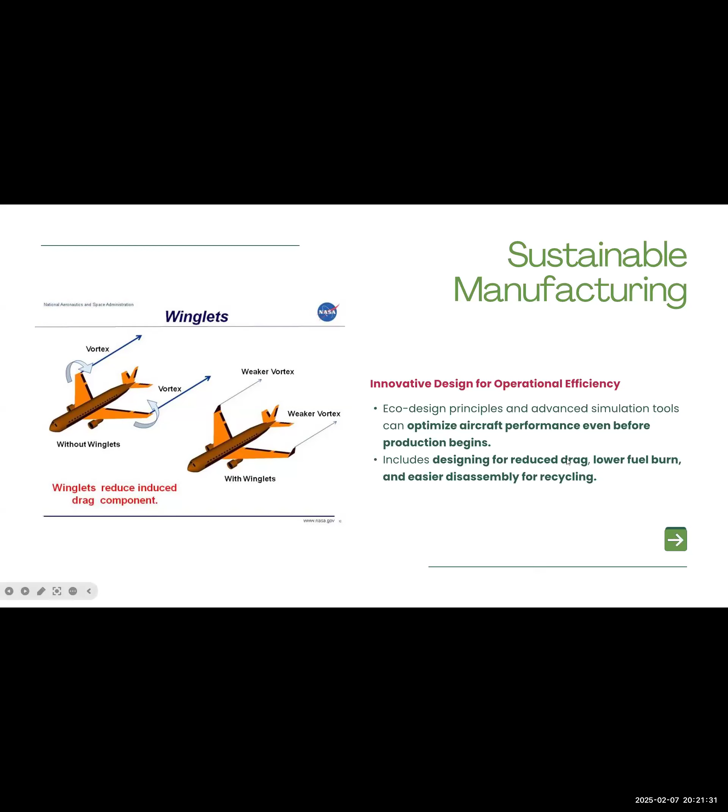So now we are trying to redesign the plane itself to design for operational efficiency. Eco design principles are also used, which includes designing for reduced drag and lower fuel burn. All these things are taken into consideration, and new sustainability is brought into the aviation industry.

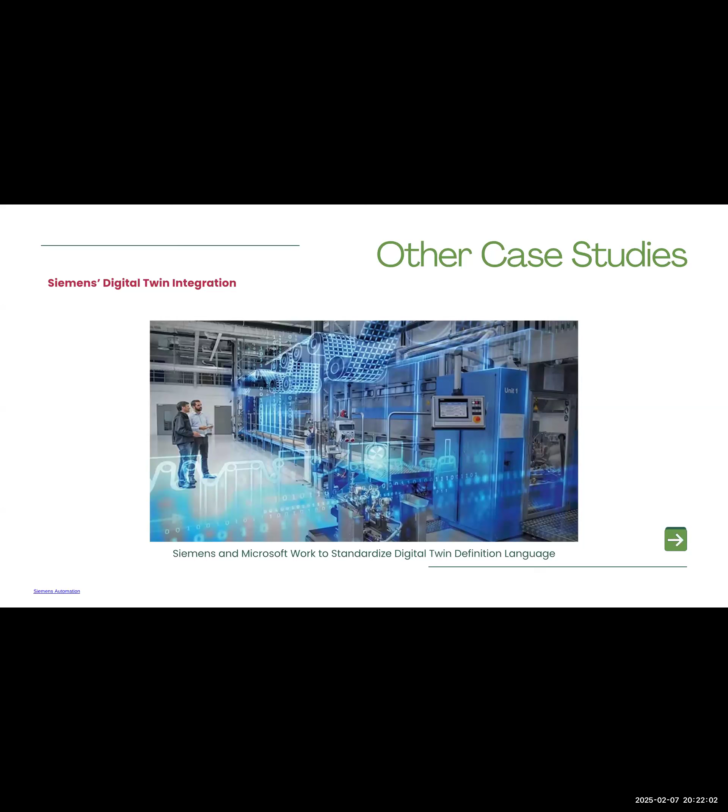Siemens digital twin integration is also a major part. They are trying to integrate the digital twin in a paper mill, a printing mill, and also in the wind turbine industry. They are also trying to do it in thermal power plants. So Siemens and Microsoft work together in standardizing the digital twin definition language.

Tesla gigafactories is also a case study, with 50 gigawatt-hours in annual battery production by 2020, and 5 lakh Tesla cars powered with renewable energy. Net zero factories are also coming. Tesla is integrating renewable energy sources such as solar power with advanced robotics to create efficient vehicles.

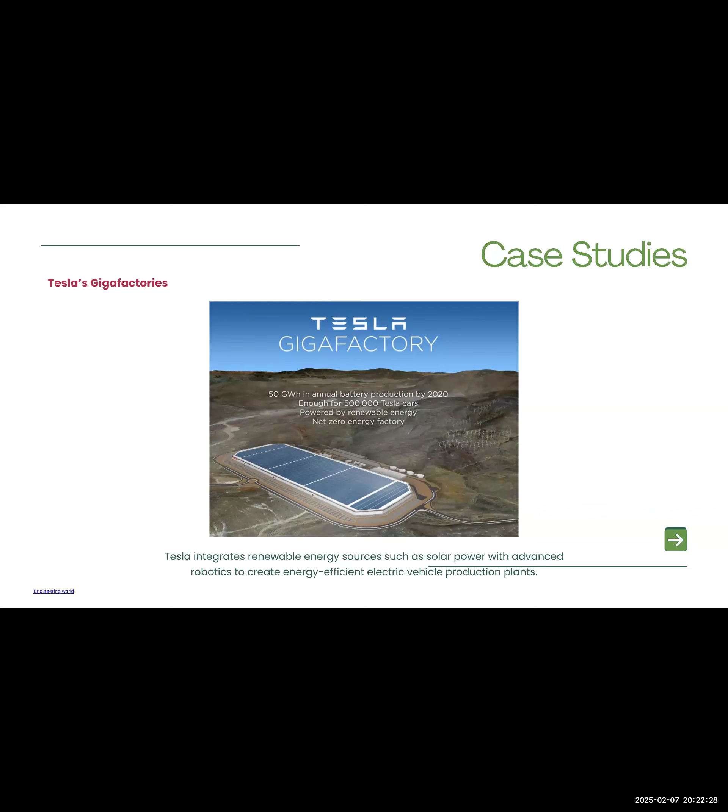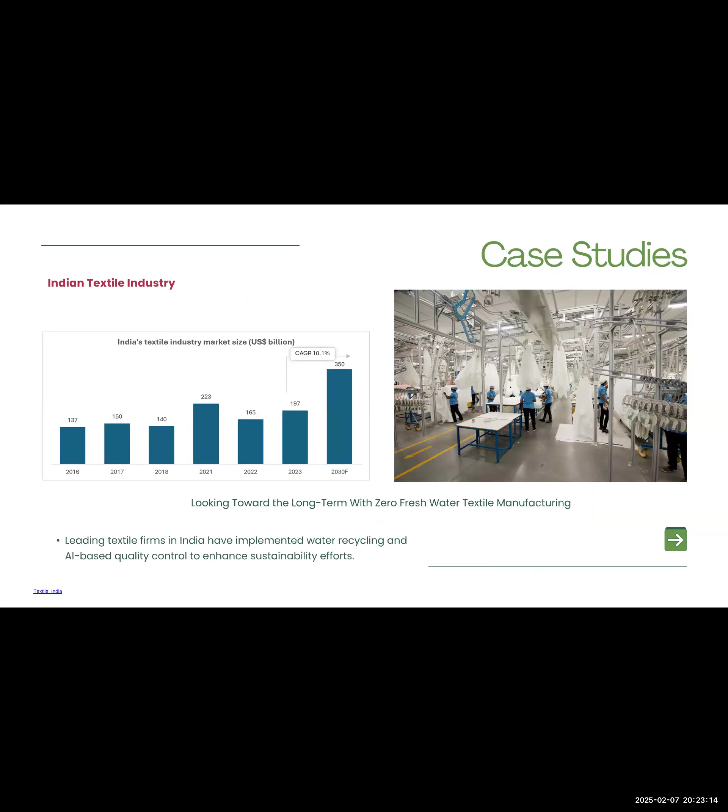So what are the challenges? High initial investment is a big challenge. Lack of skilled labor - as of today we don't know how the world is going to go, what are we up to. Data security and privacy is also a major concern for us. Resistance to change from traditional users. These are the challenges trying to hamper sustainable manufacturing in today's world.

What are the future directions going to be? The development of AI-powered sustainability assessment frameworks is going to be there, along with policy frameworks and incentives to encourage green technology. Suppose if somebody buys a green car, their tax will not be there, or there will be no toll price for green technology cars, something like that.

There will also be increased focus on cyber resilient smart systems, bio-based materials, and degradable alternatives for sustainable production we should think of. There has to be a perfect collaboration between industry, academia, and policymakers to make Sustainability 4.0 the talk of the town.

To conclude, Sustainability 4.0 presents a transformative approach to achieve environmental and economic sustainability in manufacturing by integrating advanced technologies, enhancing operational efficiency, reducing waste, and contributing to a greener future. The transition requires collaborative efforts between various stakeholders, and today, towards a net zero carbon economy, the role of 4.0 plays a very important role.

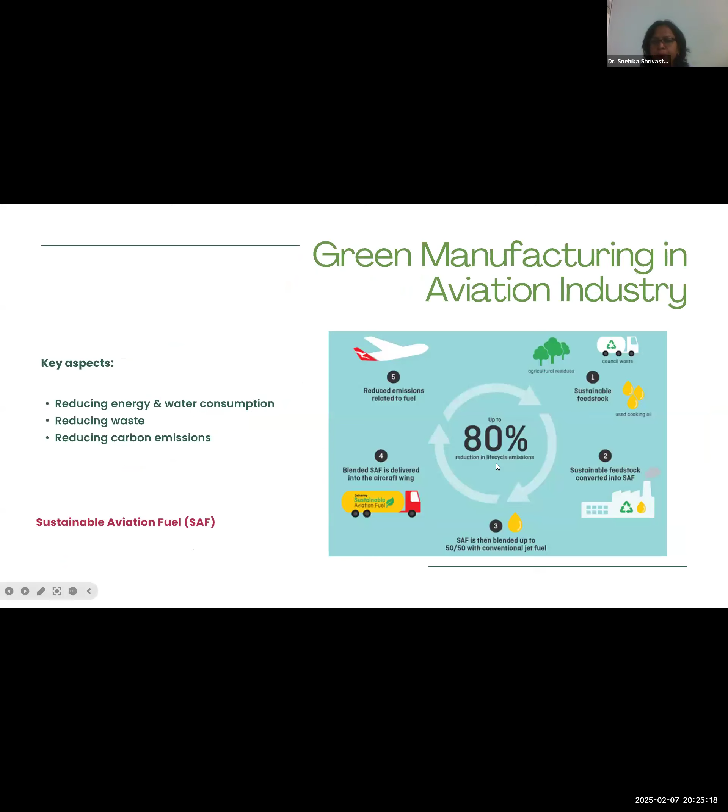So in totality, I just took one industry, the aviation industry, and looked at what's going on in it. How is sustainability thought of there? It's still a long way to go. And one of the most inefficient machines which exists is the aeroplane. So I thought, let me take the aviation industry and talk about sustainability.

Good evening, sir. Yes, sir. Sir, my question is, you are telling the aviation industry or aircraft itself is one of the most inefficient machines, I believe. Can you substantiate that a little bit, like in what way it is so inefficient? In terms of only sustainability or in any other aspects?

Everything, sir. Sustainability means energy efficiency. Certainly, energy efficiency thinking comes in. For example, if you buy a flight, you have to have spares, and these spares are not so liberally available. This industry is not as competitive as the automobile industry, so prices don't slash very fast. And then there's its own safety and security reasons. There are not many competitive players in that industry, so cost never comes down.

So all these things make it unsustainable. You end up paying more money to buy or use such a vehicle. But in today's world, for fast transportation, we certainly require such things. How can we balance this?